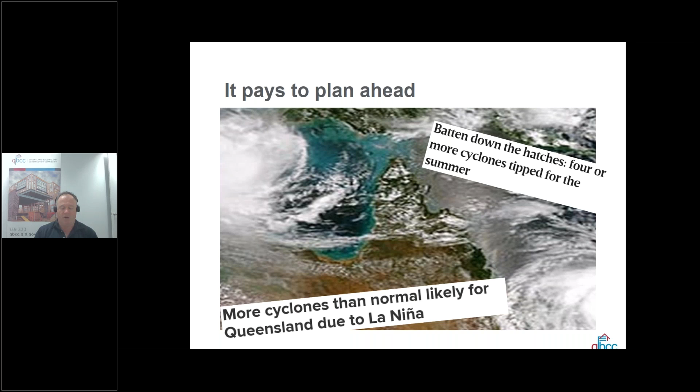There are many ways in which a site can be managed, and we will try and go through what we think are the more common items to be managed, but I'm sure you will also think of many more. Being prepared before the storm should go a long way to aid the recovery once the storm has passed.

Preparing your site. You may be in the unfortunate position that a natural disaster strikes during one of your builds, and I'm sure in North Queensland this is a matter of when it will happen rather than if. As a builder or principal contractor, it is your responsibility for the management of the site, and accordingly this will include the preparation of the site in the event of a storm.

Building sites can be dangerous places at the best of times, and good site management and housekeeping is something that all builders should aspire to. Not only does this make it a more pleasant place for your trades to work, it is generally safer and may avoid any costly penalties should there be a workplace incident.

I'm sure a lot of these points may seem like common sense, but good habits should be part of your daily routine. Should an unexpected weather event arise, you can respond more quickly and hopefully minimise damage, avoiding additional material and costly time delays. For any business, another costly and sometimes overlooked damage that can occur is that to your reputation, which may not impact the work you currently have in your books, but may be felt sometime in the future. So it pays to be prepared.

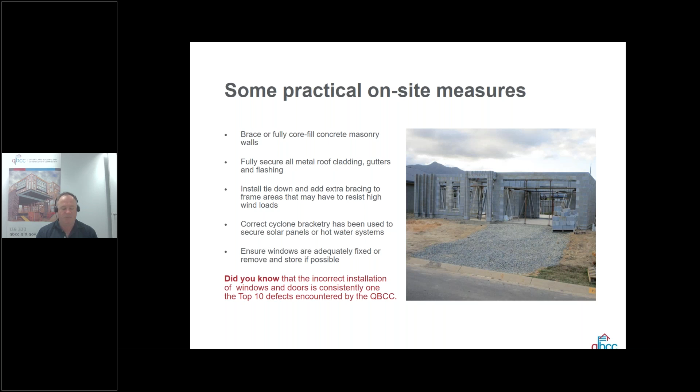In the event of an insurance claim, if your site has been poorly maintained, this may lead to premium increases in the future. So if you can demonstrate you have taken as many steps as possible to lessen the impact, it may lead to a more favourable discussion next time your premium is due.

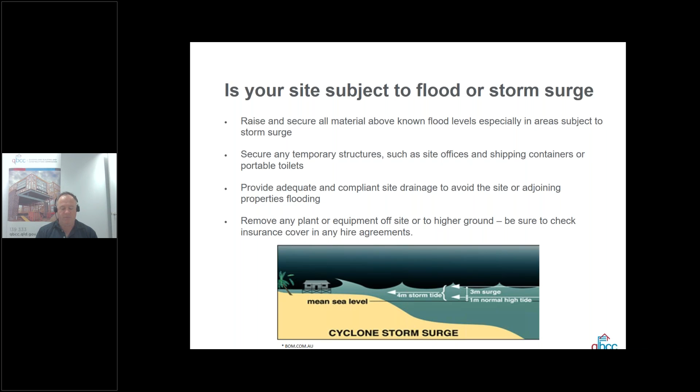It may not be immediately obvious, but it pays to be familiar with the location of your building site. Adverse weather such as heavy rain and overland flow or storm surge associated with low pressure systems during cyclones can present conditions that would be considered out of the ordinary for your location. It may also pay to check the storm cover insurance in any hire agreements for plant or equipment you may still have on site.

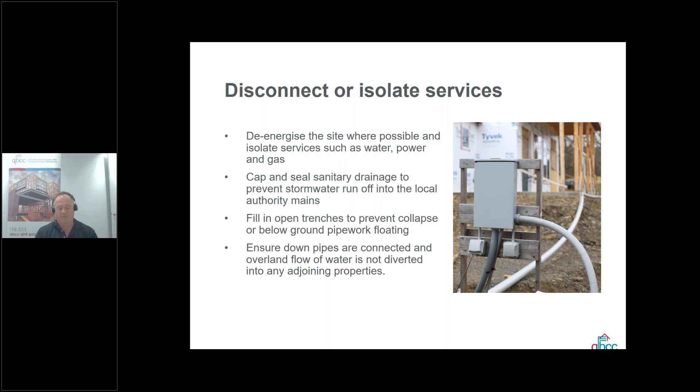Wherever possible, isolate or disconnect services that feed into your site. Disconnection should help minimise any live hazards that may exist when you return. If part of the building was to fail or collapse during a storm and cut or rupture any connected service, having them de-energised can also help avoid damage to the service provider's main infrastructure. Avoiding damage to the main infrastructure can help aid in the community recovery after a storm if time is not lost to re-establish essential services.

Offsite preparation.

Having a checklist in a time of crisis will allow you to systematically deal with issues and prioritise what needs to be done first. The checklist will also allow you to allocate items to specific people, and you will be less likely to miss an important task. Having thorough checklists will help aid you in pre-planning and also in recovery.

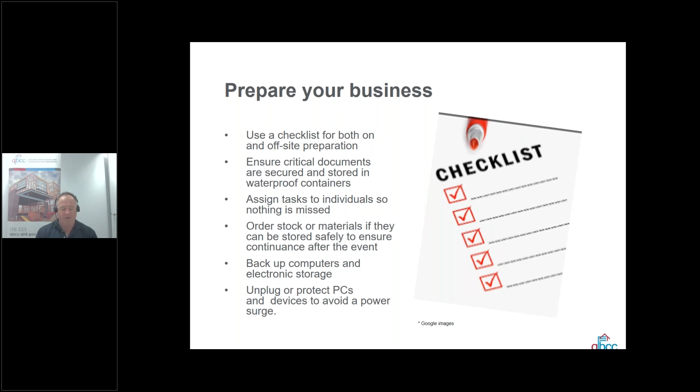Part of your plan should also include a review of all your business insurances to ensure they're up to date and reflect the true value of your business. It would be wise to check the current value of any plant and equipment, and if your insurance also covers any equipment that may be on hire.

Don't forget, your staff could be anxious and have to make emergency plans to secure their own family and property. So make sure you have contingencies in place and there is time for everyone to be safe.

Fuel for plant and equipment can become scarce in the days or weeks after a natural disaster. So filling up your vehicles and having some in reserve should be included in your plan. In times of emergency, you may be asked to help others if you have essential equipment. So having some in reserve would be a good idea.

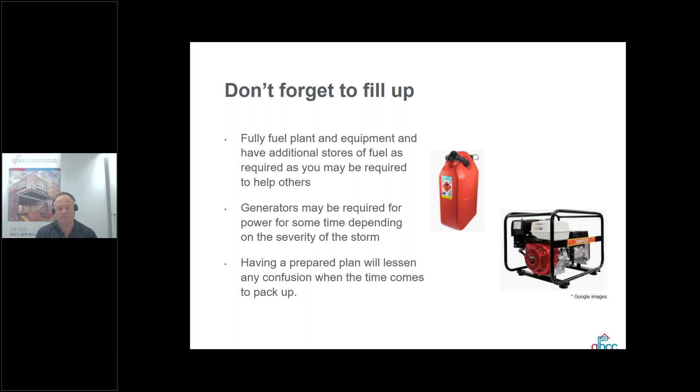Thank you, Bill. Okay, building work and site wind classification. Even in non-cyclonic regions, sites may be subject to very high wind loads based on a combination of factors. With most construction work generally specified in relation to a site wind classification, it's very important that this is correctly determined prior to commencement.

For new work, such as homes, sheds, commercial buildings, wind classification is typically already determined by a professional such as an engineer or building designer, and should be detailed on the approved plans, Form 15, or approval documentation. For renovations, smaller additions and re-roofs, there may not necessarily be an engineer or designer attached to the works. Wind classification can still be determined using Australian standards such as AS 4055 or 1170.2, or discuss with your regular engineer or certifier. There's also a number of helpful online tools and videos available, for example on the Cyclone Testing Station webpage.

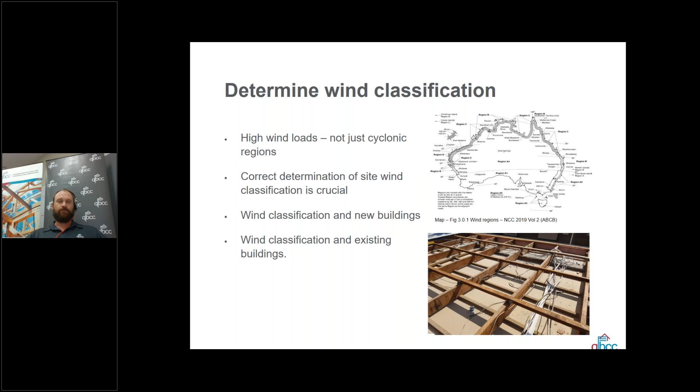Once site wind classification is determined, construction work can progress as per the approved plans, the National Construction Code, and any applicable Australian standards such as 1684 for timber frame construction, AS 4440 for roof truss installation, and the NASH standard for lightweight steel construction. Manufacturers' guidelines can also be relied upon for appropriate installation detailing for various wind classifications. When utilising these guidelines, ensure systems aren't mixed or mismatched unless explicitly approved so by the manufacturer.

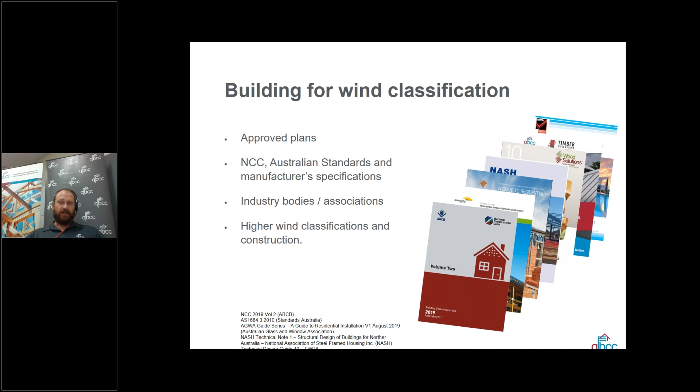There's also a number of industry bodies, associations and organisations such as the Australian Glass and Window Association, Timber Queensland, Wood Solutions and the Australian Roof Tile Association that have comprehensive and often free industry resources covering things like best practice, compliance, installation tips and industry updates. Generally, as wind classification increases, so too does the strength and robustness requirements of our construction work. When working in higher wind regions, you might see claddings required to be thicker, changes to framing and fixing detailing, or increased reinforcing requirements.

When we're looking at roof construction for housing, it's important to have an understanding of the different pressure zones to a roof, as identified in Australian Standard 4055. The areas subject to the greatest wind pressures are the roof corners, followed by the roof edges at the ridge, eaves gutter end, hips and gable ends.

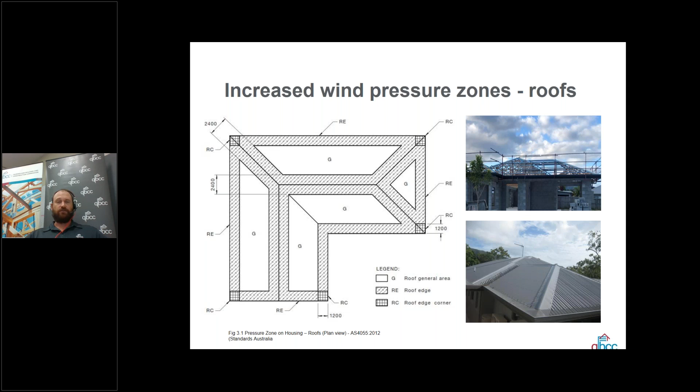These areas typically require more stringent construction detailing, such as closer batten centres or the use of cyclone assemblies in metal roofing, and the installation of additional mechanical fixings to roof tiles, just to name a few.

Similarly, when we're looking at external wall construction for housing, it's important to understand that the corners of our buildings are also subject to the greatest wind pressures. This can equate to more robust construction detailing for elements within these corner zones, such as claddings, linings, and the associated framing supports, and things like windows and doors, even when only part of the opening falls within a corner zone. When in doubt, check with the manufacturer and your certifier.

Returning to site after a weather event.

Before returning to site, make sure you keep up to date with the reports from emergency services and the local media. Ensure that you send suitably qualified staff to assess the site for damage, and maybe not the first-year apprentice. Preferably send staff with a buddy, just in case.

After a storm or weather event, be aware that many hazards may exist, and having a plan or checklist may greatly assist in re-establishing the site. You might come across new hazards that did not previously exist, for instance, structural damage to the building under construction, or items deposited on the site from other areas.

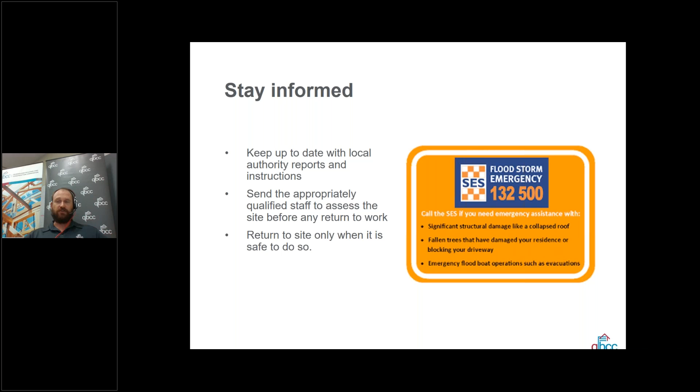Quite often in natural disasters, significant damage is sustained to service provider infrastructure and assets, and there can be long delays associated with these services being returned to their normal working order.

When the time comes, you should only return to site once it is safe to do so. If you identify areas where damage has occurred, or where dangerous substances may have been deposited, it may be necessary to safely barricade or secure off these areas until there is time to put a plan in place.

Don't forget that native wildlife may be seeking shelter during a storm, so remain aware that you may have some additional and perhaps unwanted guests living on your site.

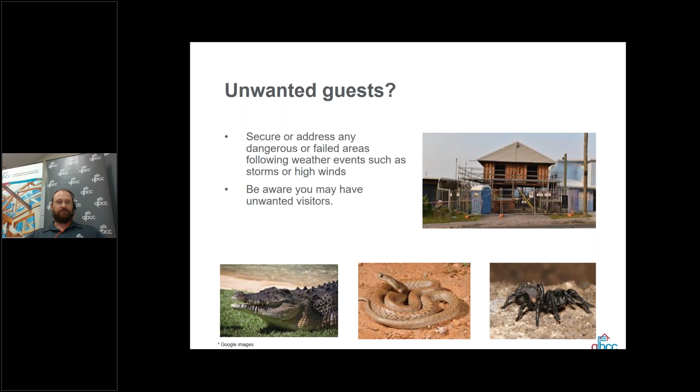Recommissioning of services may be necessary to identify any damage not immediately evident as part of the initial site check. Always ensure suitably qualified contractors are used when undertaking these recommissioning works.

Foreign materials may have been deposited on the site during a storm, so be sure to have any suspect materials tested before they're moved. When you do eventually move or dispose of site debris, ensure you use appropriate personal protective equipment.

Please be aware that there have been some recent changes to legislation relating to occupational plumbing licensing. Refer to the QBCC website for further details.

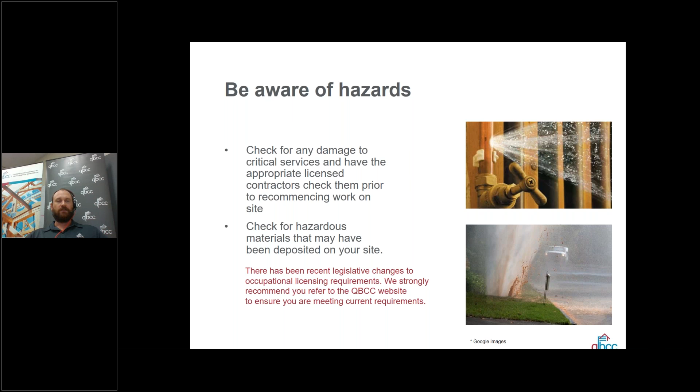Not all hazards encountered will be immediately visible. In fact, some may be invisible. Solar panels, for example, may be supplying power back into the electrical boards, even though the mains power may be disconnected. Ensure these systems are checked by a qualified electrician as part of your site check.

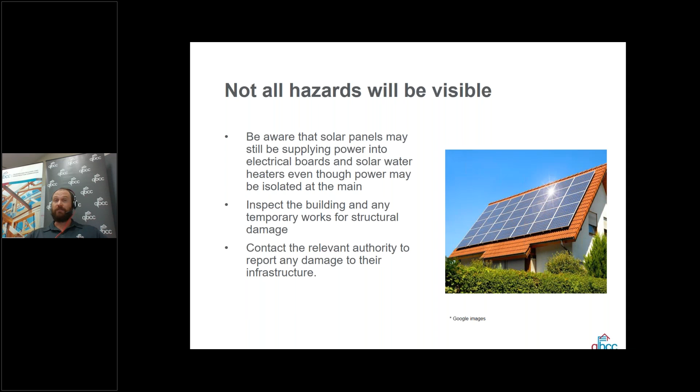And now I hand you back over to Bill. Yeah, thanks, Heath. So, resuming work.

There's no need to wait for a storm. You can register your business with the QBCC Find a Local Contractor page now, which can be a useful tool to promote your business and puts owners in contact with trades who work in the local area.

Natural disaster repair contracts are also available on the QBCC website, which can only be used for repair work and not the construction of a whole new dwelling. More information regarding disaster recovery for licensees is available on the QBCC website.

You can also register your details on a disaster recovery rebuild register when a natural disaster occurs, which is a separate register that is established for licensees interested in working in disaster hit areas as part of a recovery.

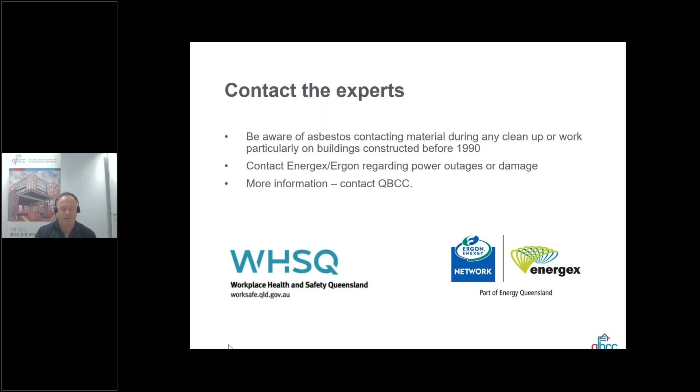You may be returning to work on an existing site or contacted by an owner as part of the reconstruction process and need to be aware that new hazards may now exist at the location. Older buildings constructed with asbestos-containing materials may have suffered damage during a storm, and precautions need to be taken even if minor or emergency works are undertaken on the building and should be cleaned up and removed before undertaking further reconstruction work. Similarly, if there is any damage to other infrastructure, such as power, communications, water or gas, contact the appropriate authority or engage suitably qualified trades to check the services before continuing.

So where can I go for more information? More information regarding storm preparation and recovery can be found by researching the organisations that we have listed here. The QBCC website has a wealth of information or will provide links to other useful organisations. You may already be familiar with the TV commercials featuring Jonathan Thurston as part of the Get Ready Queensland Storm Season campaign, and a number of others provided by other authorities or some of the insurance companies. Some of these sites also provide useful planning tools to help choose more resilient building methods and materials to help resist or minimise damage from a natural disaster.

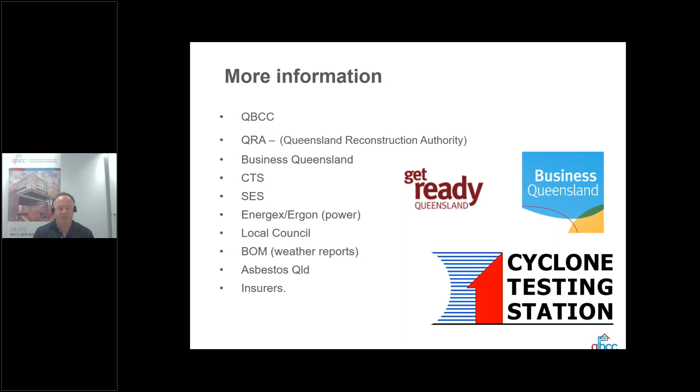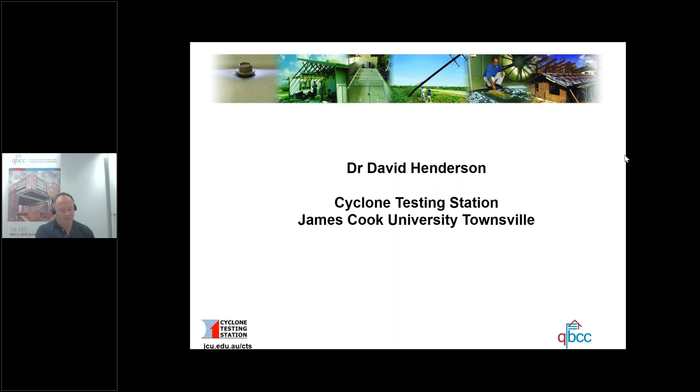We'll now move on to the second part of today's storm season webinar. We're fortunate to have Dr. David Henderson from the James Cook University Cyclone Testing Station here with us today. He is the Senior Research Engineer at the Cyclone Testing Station, and during his 28 years at the CTS, he's broken everything from screws through to complete houses. He's also conducted cyclone, thunderstorm and tornado damage surveys in Australia and overseas, and he's on the Australian Standards Committee for wind loads for housing and metal cladding. Many of you may not be familiar with the work that is undertaken at the CTS, and David will today give you an insight into the work that he does and what he gets to see when investigating the before and after effects of severe weather events. So without any further ado, I would now like to hand over to David Henderson.

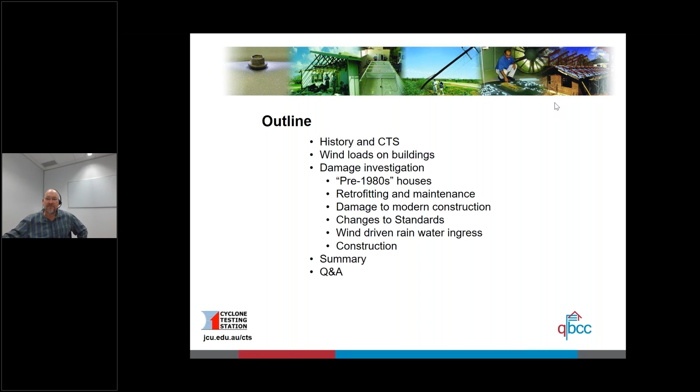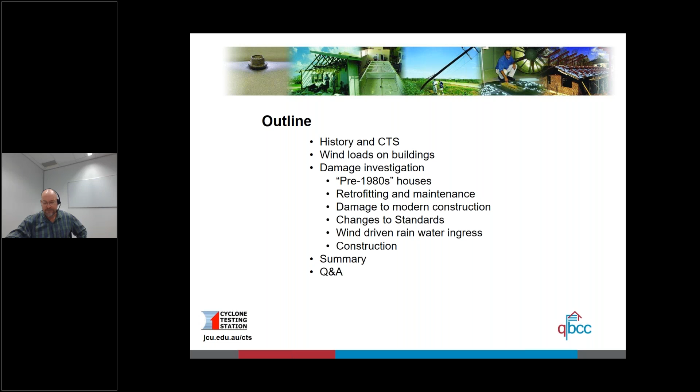There we go. So as Bill mentioned, we're going to have a quick history lesson on wind damage, and we're going to focus a little bit on the CTS, but really try to drive a lot of the examples that we've seen from damage investigations and see where that leads us into changes in current standards, and a little bit about some construction issues that we've come across in either current construction or wind damage, wind-driven rain being one of them.

So I'm sure everyone's fully aware that Cyclone Tracy caused massive amounts of damage when it went through Darwin, with 70 to 90% of housing being destroyed in the path of the storm. However, engineered structures did perform better than the housing. Similarly for Hurricane Andrew, 20 years later, you had this massive event come through and took out 63,000 homes. Both of those resulted in massive changes to home building standards in both countries.

What is it with the houses? Well, the houses are a common but complex machine, if you like. It's been a traditional process that's evolved from holding the roof up, not tying it down into the ground as the wind's trying to pick it up and shake it about. I mean, there's many elements in a house. You've got your top plate, your multiple ribbon plates, your rafters, your ceiling joists, king posts, queen posts, collar ties, lintels, all of these things, and they're all different in terms of their load sharing, how the load transfers through the house.

Whereas a portal frame structure, a shed or a major commercial building is so much simpler in terms of its beams and rafters design. Housing is very complex in that, and yet we've got to get the load path as that wind's trying to pick the house up through, with the roofing attached to the battens attached to the rafters, etc., or trusses all the way down. So wrist bone connected to elbow bone, shoulder bone, all the way down to ground level. So it's that load path that we've really got to pay attention to in our design and construction of our homes, and that leads us to that.

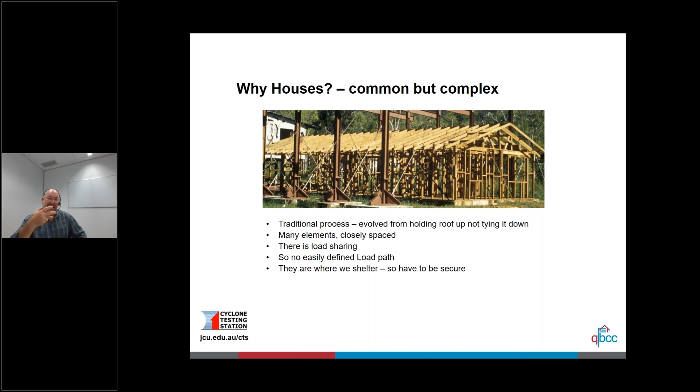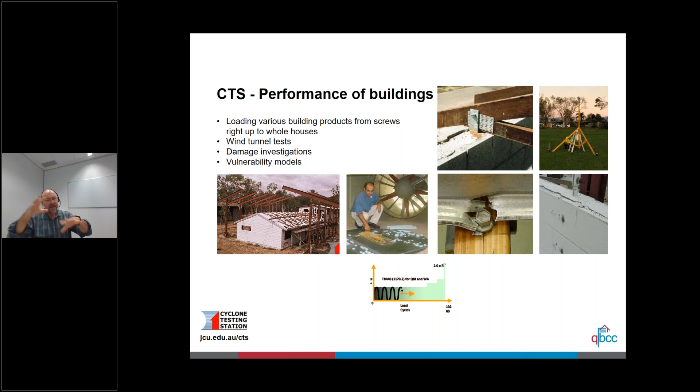Our homes, it's generally where we shelter, so they have to be secure. In terms of our understanding of homes, it's the Cyclone Testing Station, like other organisations, really digging into these complex little structures, our housing. So, as Bill mentioned, we've looked at testing everything from roofing screws, batten screws, all those types of things, right up to loading up full-size houses and applying loads across the roof structure and pulling on the walls and seeing how the houses perform. And also in that, we've got a boundary layer wind tunnel, like other places, where when you push the very turbulent wind across there, you're looking at how the pressures interact across the roof and the walls and all these different loading combinations.

But all of that presupposes that we know what the wind is or what we're designing for in the wind. So in terms of the NCC, the National Construction Code, we have the country divided up into several regions, Region A, B, C, and D, whereas in Region B in Brisbane, we've got 57 meters per second, whereas Region C, where Townsville, Cairns, and Mackay are, the cyclonic region, we're looking at 70 meters per second for design.

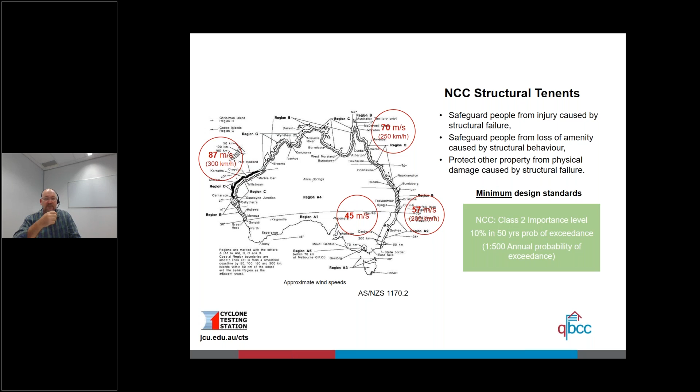Now that's set as a minimum design criteria. So the NCC puts out a minimum acceptable design standard. So we're basically building to the bare minimum, if you like. And those wind speeds that I was saying are for the same risk level across the country in terms of a class 2, so typically seen as our housing and normal type construction, which for a 1 in 500 annual probability of exceedance translates to roughly 10% chance in 50 years that that design speed will be exceeded. So that's what we're designing for as a minimum criteria.

Something to be on the lookout for is that within the latest public comment version of the wind loading standard, AS 1170.2, Region B for Brisbane is being extended. This is apparently to take into account a lot more of the storm effects, looking at all the anemometer records around that region. So the people involved in that standard have put through that expansion of Region B in that area.

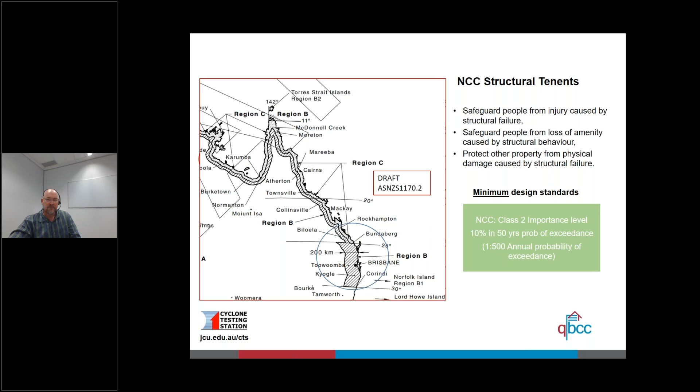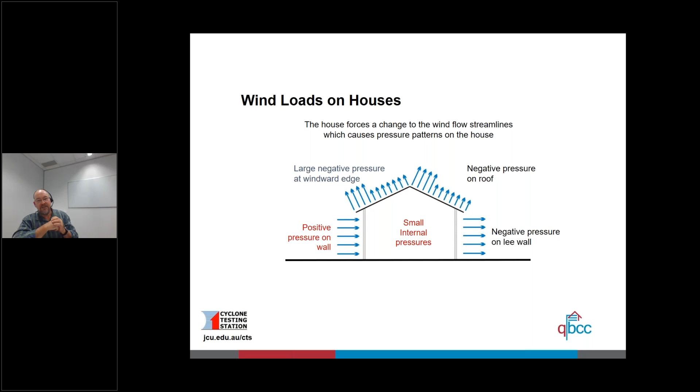So in terms of the wind loads over the house, we've got the wind rushing into that windward wall, going up over the roof and around the back of the house. That means we've got that positive pressure pushing on the windward wall, lifting up the roof, trying to pick the whole roof up by its roof cladding and pulling on the leeward wall. Now, if we have a breach in our building envelope, like a broken window or a broken door, that positive pressure instantaneously enters into the building space, potentially doubling the load on the structure.

Now, in cyclonic regions C and D, within the wind loading standard for housing, AS 4055, this is the assumed case. It's not necessarily how houses may be designed in non-cyclonic regions. There's commentary coming into the latest version of AS 4055 that should hopefully clear that up for a lot of people though. So look, we're going to take some examples out from different damage surveys that we've done.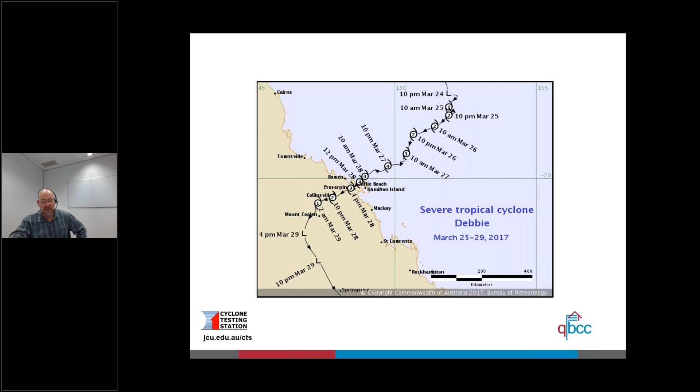So the big one obviously recently was when Tropical Cyclone Debbie came through in the Whitsunday area. Very, very scary event coming down through there. You can see there on those timestamps how it just sat and hovered around the Hamilton Island, Airlie Beach area. So not just these really severe winds, but the duration of them and the driving rain for that whole length of time as this cyclone is just moving around very slowly across the coast.

So the question is, why do we do damage surveys? What's there for it? Well, basically we're looking to see what did bad and what did good, looking at the good performance and the bad performance. But also crucially, it's really looking to see, was the design standard appropriate? Was the wind speed exceeded? In terms of, was this gone beyond that minimum design criteria? Was it the correct use of the design criteria, using the right materials put together in the right way?

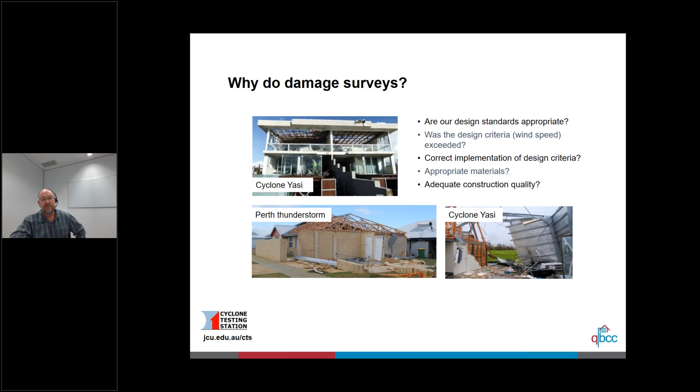So again, it's a matter of not just looking at the broken stuff, but also looking at the stuff that performed well. So we focused on the coast in this example, and really trying to get an idea of the wind speeds across those impact zones.

So we obviously highly rely on the Met Bureau's anemometer stations across the region, their official 10-meter tall towers in flat open terrain, typically at airports. And also we've got smaller towers that we drive out, we set up, we run away, we let them record the data for us, and that's basically at house height, and then we have them scattered with the permission of the councils. We've got them scattered through the towns that are in the impact zones to get wind speeds across there.

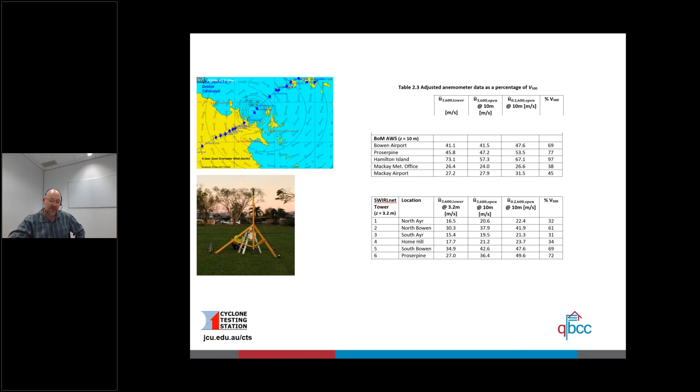So from those measurements, other measurements that were there as well, we can try to get a guesstimate of the design wind speeds across the region, which is really important to try to relate back to the aspects of damage and the aspects of how the building codes performed with it and in the construction.

So as we can see, we've got the extreme winds coming through Hamilton Island, Airlie Beach area, down through Proserpine, which is around 70 to 80% of the design wind speed, and then really dropping right off to less than 50% down Mackay to the south of the track, and less than 50% up at Home Hill and to the north of the track.

And you can see how wide the footprint of the cyclone is coming through. Again, a very massive, scary event coming through. A couple of 100 kilometers wide footprint, but remembering that the main peak wind speeds are near the center of the core for it.

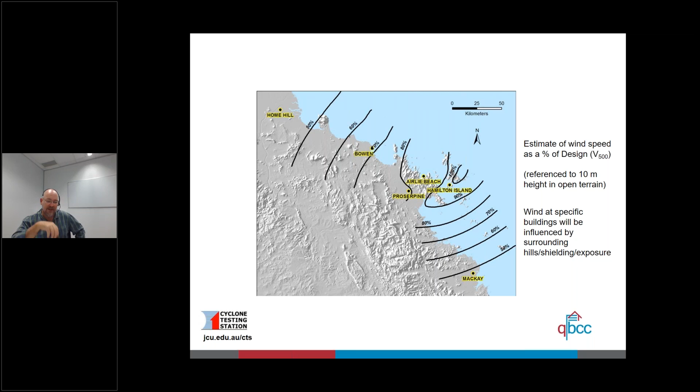So let's jump down into Proserpine then. So we work very closely and are thankful for the data from QFES, Fire and Emergency Services and Fire and Rescue New South Wales, as they're going around doing their rapid damage survey, looking at what they can see from the street in terms of what's needed, tarps or whatever else might be for their houses.

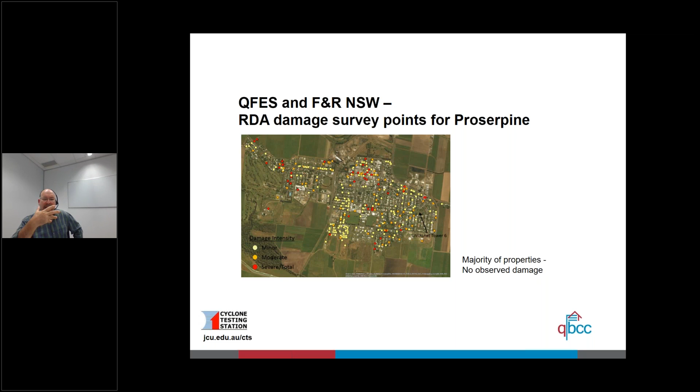And so the majority of the town there is green. So no real major issues for the majority of housing. If we strip those green dots away, we can see though there's a lot of minor, moderate, and severe damage across the town. And a lot of that damage, the severe damage, was associated with older housing. So housing built before those big changes came in the early 80s.

So you can see a lot of roof missing with the battens attached. The image in that top center line, you can see the existing old timber batten with the original 2 nails punched into the rafter. The cladding down in the lower left corner did its job well. New cladding, screwed to the old battens. The cladding remained attached to the battens. No worries, it was just the battens that let go from the rafters.

The retrofitting of that new screw roofing down to the battens stopped there. There was no strapping or no batten screws from the batten to the rafter connection, or from the rafter to top plate and rafter to collar tie and all those other things to strengthen up that roof structure, to improve its connections to the wall area.

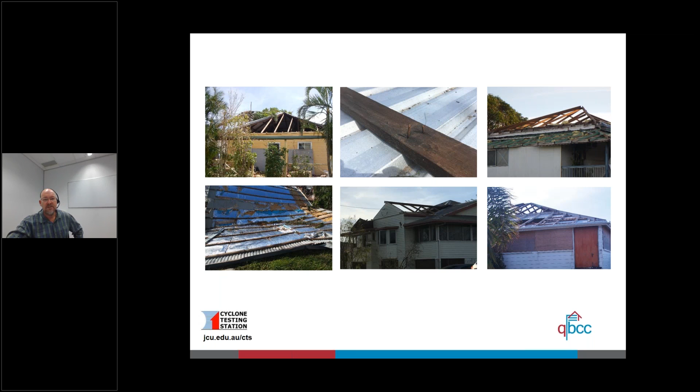And it's not just in cyclones that this happens. From the 2014 Brisbane thunderstorm event that went through, again, similar types of failure modes, new roofing put on older construction without the thought of the retrofitting going deeper into the structure. The image on the left, again, you can see the old batten sitting there with only a single nail this time, which should have been holding it to the rafter.

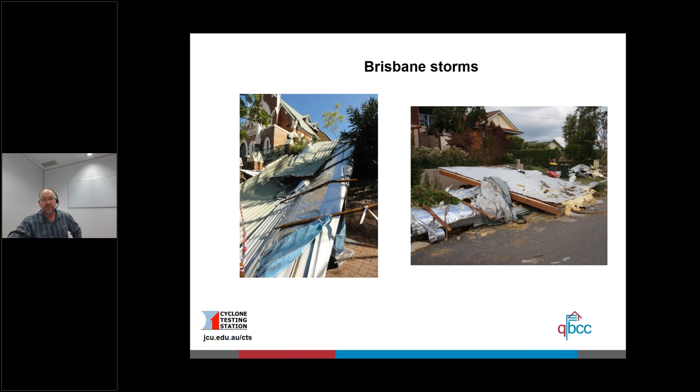Again, that should have had a batten screw, framing anchor, or strap, or whatever, to really improve that connection for it. Similarly, on the right-hand side of the photo, again, new roofing to older battens, and that larger chunk of roofing was an addition they did to the property that obviously wasn't tied down very well at all.

Now, as Bill mentioned, there is a lot of information out there. QBCC has great checklists for rebuilding. There's webinars and stuff for builders and for homeowners on the Cyclone Testing Station's web pages.

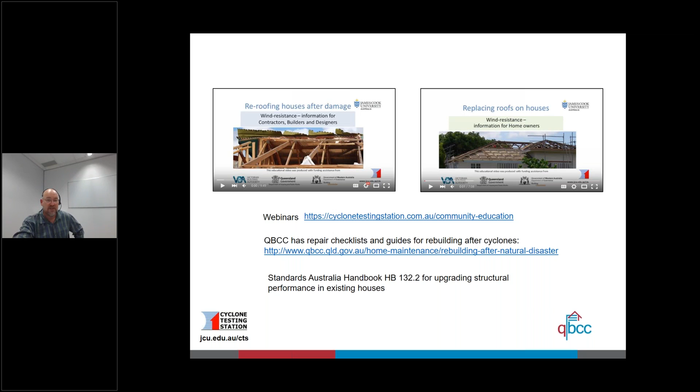There is an existing Australian handbook for upgrading the structural performance of existing homes, both cyclonic and non-cyclonic. So even when we're looking at wind speeds, that's a resource available.

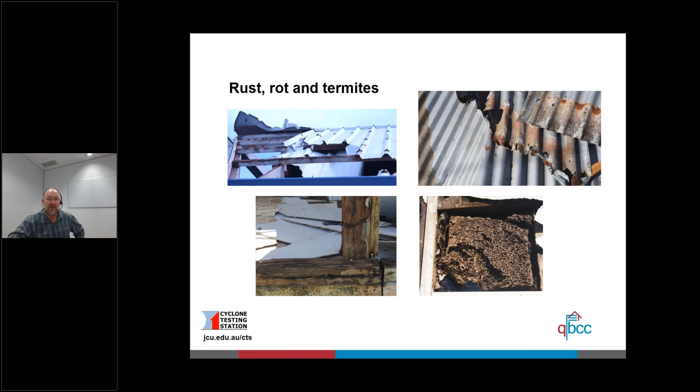What else can go wrong? One thing we come across is poor maintenance. These are pretty extreme examples of corrosion on roof cladding and screws, rot in the timber, and termite damage across the framing. Obviously, if that's in your place, you'd be doing something about it well before the event happened. But it may not be as obvious or in your face.

Here's a hotel motel on the Bruce Highway where we were doing street surveys looking for damage after Cyclone Debbie. We got permission to come on site, which was important because we'd inspected this place after Cyclone Yasi several years before Debbie, when it lost its roof during that event. So coming to see a new roof taken off during this event was notable, and remember, these wind speeds are less than 70% of the design value.

So technically we shouldn't be seeing failures of modern construction or new products. We're thinking, what's wrong with the roof cladding? We help write the standards, we do the product testing at the station - is the way we test correct? In crawling over the property it soon became obvious - no, the roofing was fine.

It was still attached to its clips and purlins. It's just that the larger rafters and framing system for the carport had let go, right down at the footing. The post had completely rusted through, and when the wind lift came up, it picked up the whole veranda and peeled it back over the hotel units. Remember, this place was re-roofed only several years before Cyclone Debbie, so this corrosion had already started happening and just wasn't picked up during that rebuild. Again, the weak link let the whole thing down.

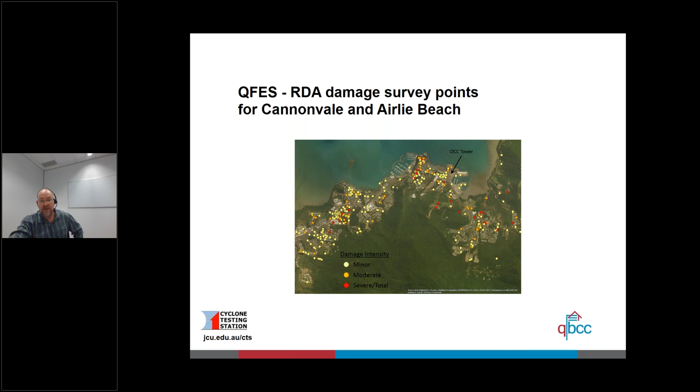If we go over to Cannonvale and Airlie Beach, on the coast, we came across examples of severe damage to modern construction as well, and a lot of examples of moderate damage. Some of those red dots are to do with flash flooding that went through some of those steep areas. But there were examples on Airlie Beach, Shute Harbour, and Hamilton Island of severe structural damage to modern construction built after that 1980 watershed moment.

A lot of that damage was to places that had a great view, that were on exposed sites. Obviously, if you've got a great view, you've got the chance of a lot more wind coming at you, and you design accordingly.

In AS/NZS 1170.2, the wind loading standard, there are factors where if you're on the side of a hill with a great view, you design for much higher wind loads. Similarly for AS 4055 wind loads for housing, instead of being down amongst the suburbs surrounded by houses with no view - which could be a C1 - if you're up with a view you could be C2, C3, C4, or even beyond the scope of AS 4055 and have to use 1170.2.

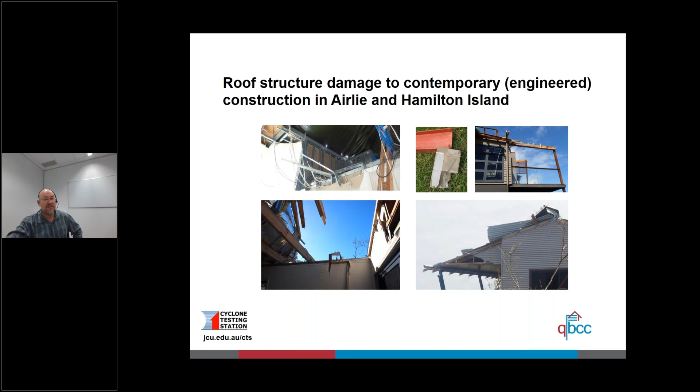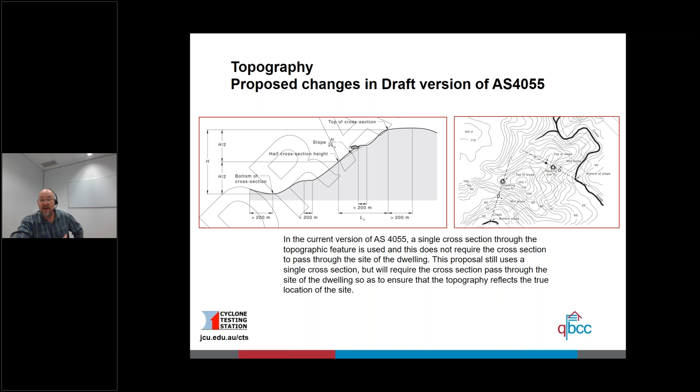On AS 4055 and issues with interpretation of that standard, in the recent public draft that came out for comment there was a whole heap of changes made to aspects, especially topography, to streamline it and make it more straightforward in working out the slope of the site for your house, and then the site classification for that location, with a lot more definitions for the top and bottom of the hill. So do yourselves a favor, look at the public draft when the new standard comes out and make sure you're familiar with those changes.

So just on topography and great views, we're back on Hamilton Island, and you can see there was a massive amount of wind load coming at this place.

You can see how the trees are completely stripped bare, lots of broken branches, everything else. So a heap of wind coming through here.

What we're looking at on the left-hand side of the image is that little bit of galv steel, the bracket that was holding the veranda beam, with the roofing screwed to it, to the top of that veranda post you can see on the right-hand photo. Now you've got a length of about 20 big roofing screws, Tek screws, 14 gauge, holding down the cladding to that steel RHS veranda purlin. But it all ended up in about 4 pop rivets in that bracket. Now that went through the design stage, the building stage, and an inspection stage, and yet that simple math of adding up all those big honking screws and ending up with only 4 little rivets wasn't done.

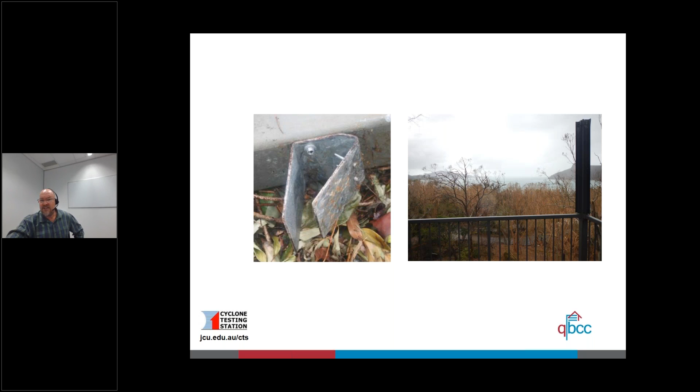So it's a matter of all that wind load getting concentrated. You've got to have bigger fixings, not smaller ones. The fact that this let go on this and several other units also meant that as the veranda peeled back, it took parts of the house with it, or the units with it, and then opened up the whole building to more water and damage.

And it wasn't just major stuff like that. There was a lot of other minor damage that resulted in a lot of major internal damage with things - cladding peeling off, gable ends, soffit linings, brick skins for not having enough brick ties or other aspects, all letting down the performance of our modern engineered structures. So these minor details not being carried through basically wrecked the building's ability to do its function after the event, really impacting on this community's recovery.

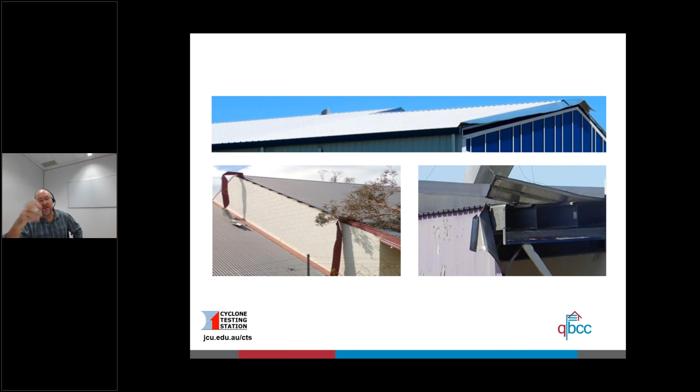A case in point is our simple bit of bent metal called flashings, trying to cover up the gaps between the roofing and the walls. These little bits of bent tin getting peeled back cause a fair bit of grief to the inside of the structures. So using damage survey data and getting access to claims data, working with insurers, we're able to work out that examples of this can cost about $1,000 per meter to repair, especially on units or strata property buildings, where the water comes in and goes through several floors and units, causing a great deal of loss.

So using that cost benefit work and finding and documenting so many of these types of failures, we're able to get changes through AS 1562.1, the cladding standard, so there's now a minimum thickness required for the flashings and a minimum fastener spacing and type of fasteners used. No longer can you use pop rivets; you've got to use real screws, and they've got to be fixing to something real underneath the cladding. So if you're not aware of it, please get a copy of 1562.1 and have a dig through that.

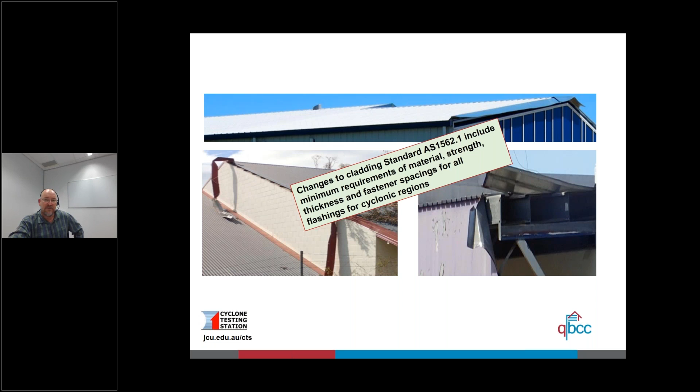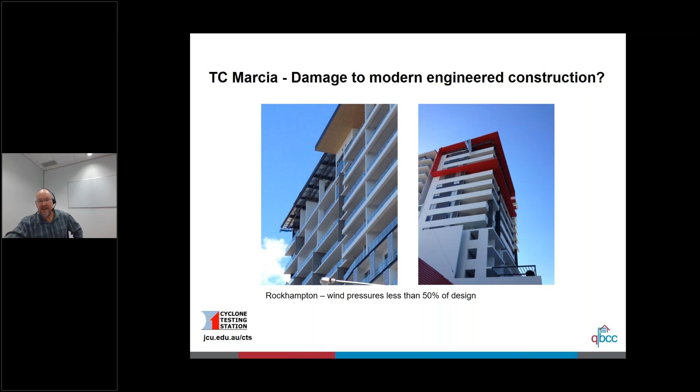Similarly, this one's an example from TC Marcia. These very modern high-rise buildings in the centre of Rockhampton had wind speeds less than 50% of design come through, and yet you've got cladding hanging over the edge of the building. You've got loss of soffits from very high up, also adding to the debris field as it gets strewn across the town. If we go up to the roof of the place, we can see the aircon's been knocked over, the vent systems, the flashings on that skillion roof peeled back, taking the roof cladding with it, causing a great deal of damage.

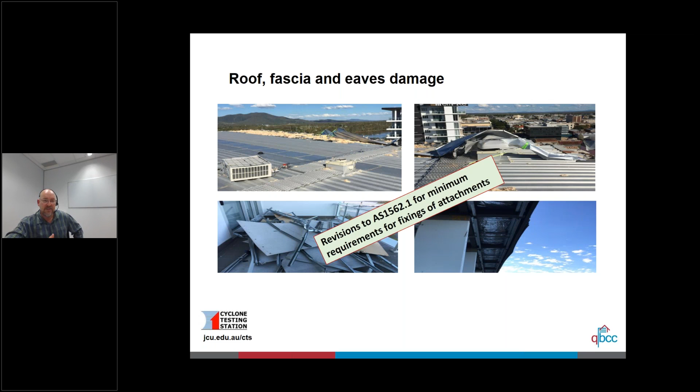So again, in AS 1562.1, we've now got minimum requirements for fixings of attachments that are on the roof structure - not just fixing to the roofing, but down fixing to purlins or other types of substantial support.

And then we get on to other things - what happens if they do fall off your building. So there's wind-driven debris. It happens in thunderstorms, it happens in cyclones. The wind picks up stuff, whether it be from the building or from what's lying around in the yard, and hurls it at other things. So we've got bits of timber from older housing getting thrown through other points, damage that's right down to complete sheds that have no proper footing details getting picked up and dragged through other housing.

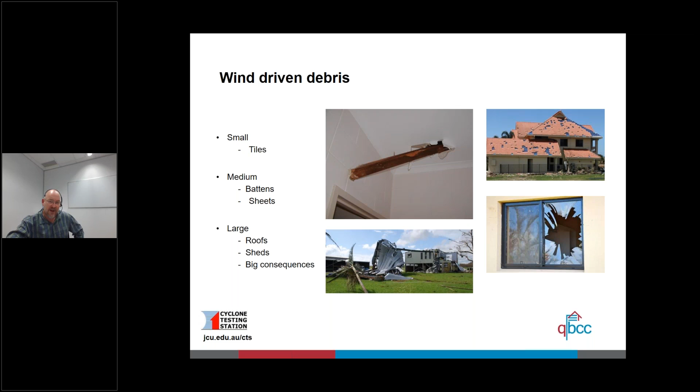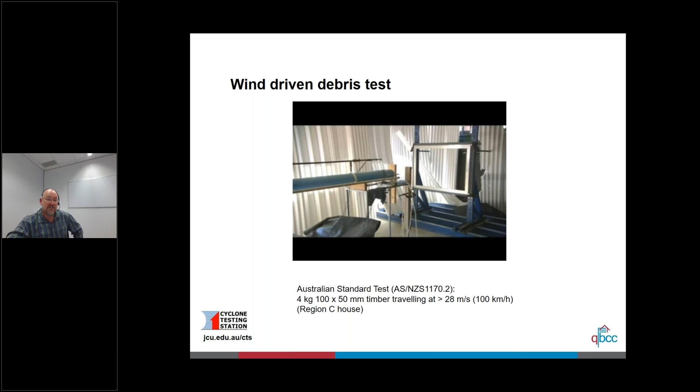There is a test that we can do. It's an Australian standard test, and yes, it is a fun test to do. We basically take a 4 kilogram piece of timber and hurl it at unsuspecting building products, and within that it's got a speed in excess of 28 meters per second, or 100 kilometers per hour, as being a fraction of the wind speed that's happening at that time.

Now, in terms of what we're looking at, you're trying to protect your building envelope. So it may be in terms of a life safety issue for a cyclone shelter, that there is a wind-driven debris test, but other times it's trying to protect that the door, cladding, window screen, or whatever it might be, doesn't get broken and doesn't let the pressure enter into the building space.

But it's not a matter of just hitting in the center of something, because that may give a lot of deformation as that missile hits. The product, or in terms of the roller door, might be able to give and absorb that energy. But if you hit right next to the edge of it, it's a different matter, it's a real cutting action. So just don't hit in the center - you've got to look at other aspects to get through to make sure the product passes.

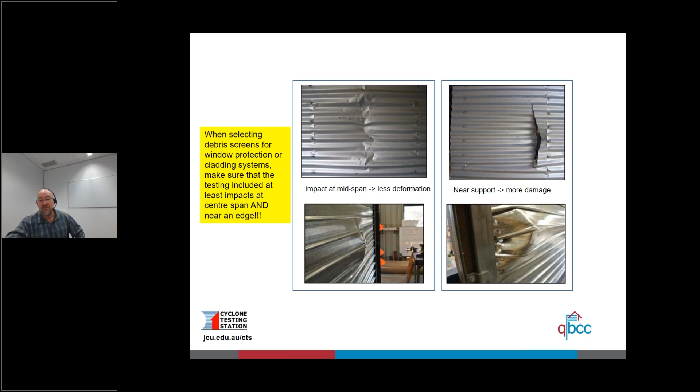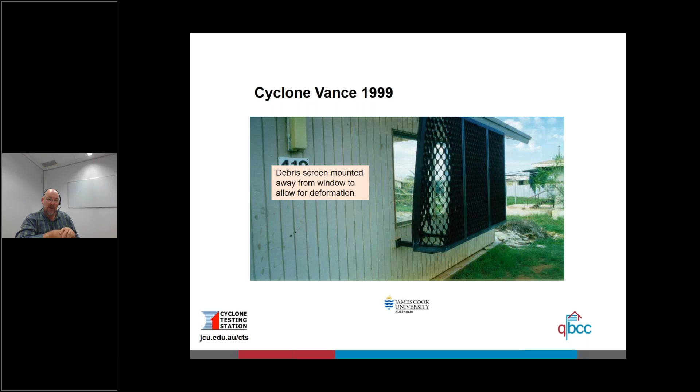Here's a case after Cyclone Vance. It's a really great window screen set well off from the window, so when it gets whacked by something and deforms, it doesn't break the window behind it. Trouble is, the front door blew in. That pressurized the building space, popped out the end wall, popped off the roof, causing a great deal of damage. We've seen that time and time again after many other cyclones - you've got doors that get let down.

Now, whether there's not enough surface area and not enough meat in the drop bolts or the locks, or they're using hollow core doors that with the lock set, you're not left any meat, and it just smashes through as the pressure pushes on it.

So it's really a matter of looking at how to get that building envelope to remain intact. If you've got a door entrance opening inwards like this, it's a matter of having a good quality lock, trying to keep away from hollow core doors with not much meat in them, and using drop bolts as well, just to spread that load out. So you've got a couple of hinges, not just a center point, but maybe a drop bolt as well to spread the load out across the frame.

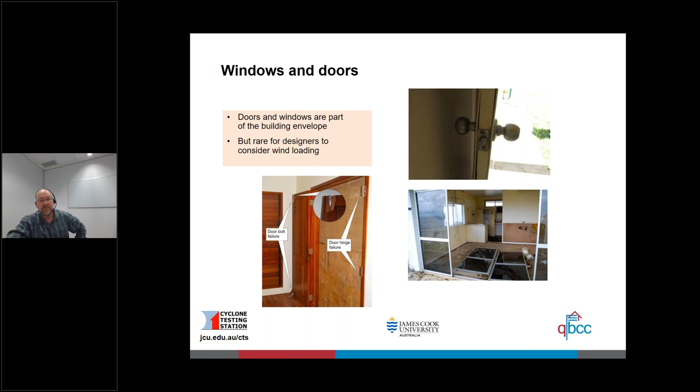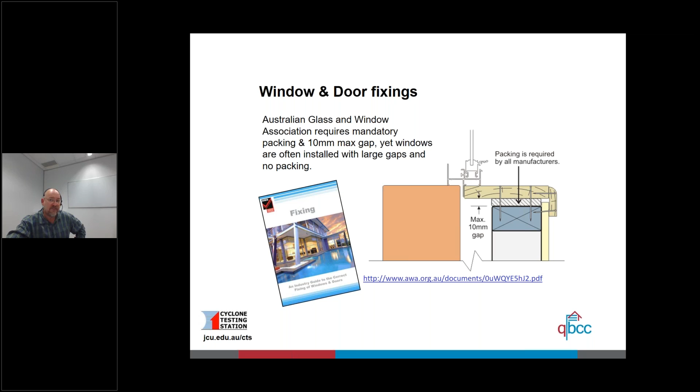Similarly for windows, issues with poor fixings of windows in terms of frame, both old and new construction. And there is a lot of work out there - the AGWA produces some great guides on how to design and fix windows into house framing. So have a look at their website on that one.

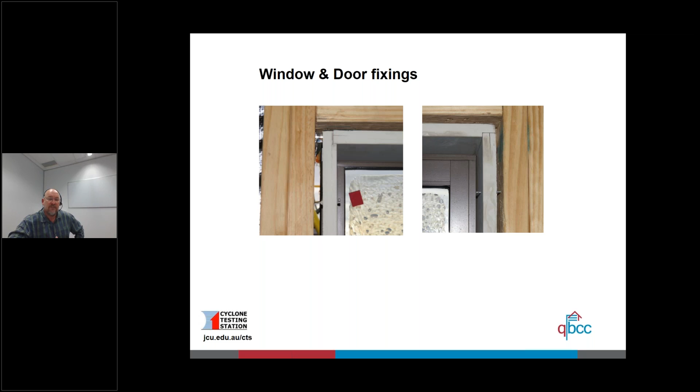A lot of the manufacturers are putting fixing details stuck to the window when they get delivered to site. These are photos taken of the information that was in the center of the window, showing the minimum required fixings, the packing, the type and size of nail, etc. However, yet again, we find a lot of issues where it's just framing or finishing nails used to hold the frame in, then covered up with the architraves - not even any packing in many examples. So again, we've really got to make sure we've got the right products designed for the right place and followed through in terms of the installation instructions.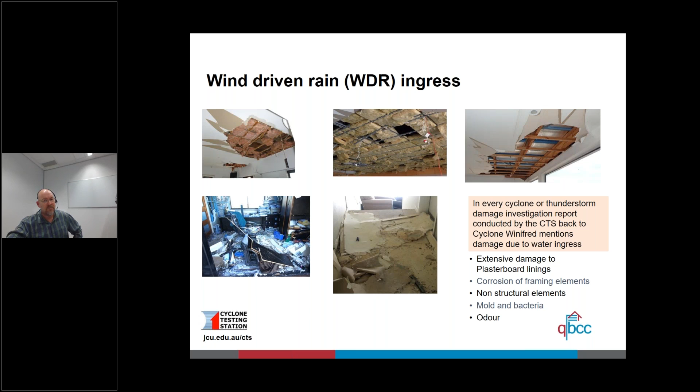But we don't actually need a hole, a broken window, or a door to let the water in. So, oops, my apologies, I've got to click here for now.

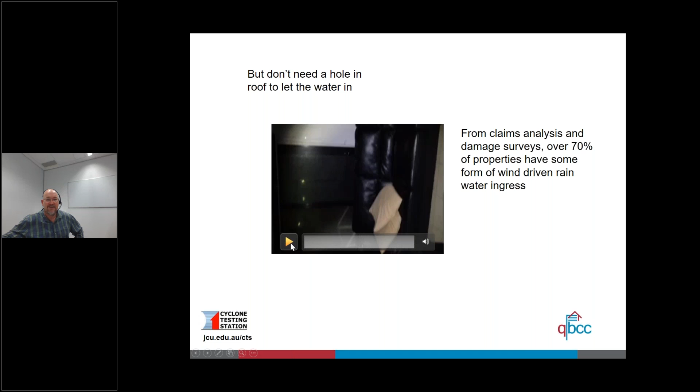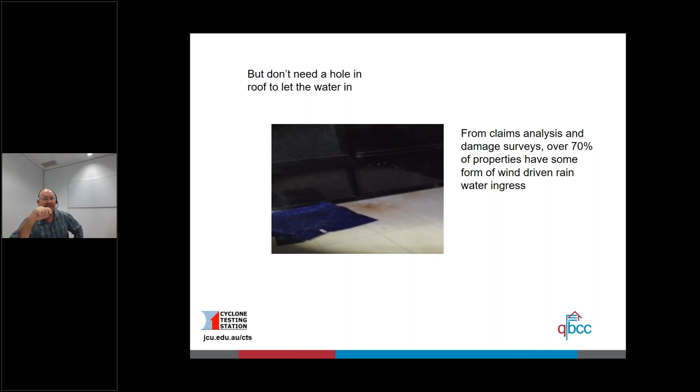So this is an example where we've got the video running. As the homeowner points back to the window, you're going to see a whole heap of water gushing through the slider there. It's also coming under the sealed end as well. Obviously he's paying good attention to safety to keep away from windows, and there's just rain coming down through that ceiling there. What you can't see is that this is a two-story house.

And that water is coming through the balcony door on the top floor as well, then coming down through the floor and down through the aircon ducts into the house. So you've got so much water coming in during these severe wind events.

From a lot of the surveys we've done across different cyclone events, over 70% of properties have some form of water ingress. Whether it's coming in through the roof, through poor flashings or ridge cappings, box guttering systems that don't have sufficient overflows, under our doors, through our windows, it's coming in through all these different places.

Some of it can just be mopped up without much distress afterwards. Generally there's a fair bit of stress to the homeowner at the time, but a lot of it does cause so much damage that has to be repaired afterwards, to the extent that people may not even be able to live in their house after the event.

So why is this? Why are we getting so much water coming through these different things? Well, in terms of windows and doors, especially glass windows, there is actually an Australian standard test, but it's a very low pressure that's being tested for. It's even well below serviceability design pressures. So even for our cyclonic conditions, it's 200 pascals, whereas the design pressure might have been up around 2.5, 3 kPa, 3,000 pascals.

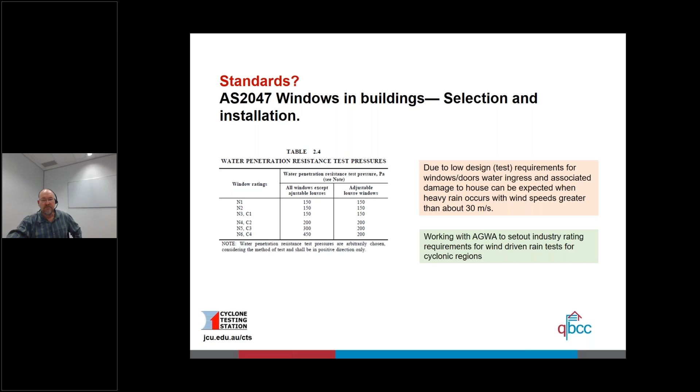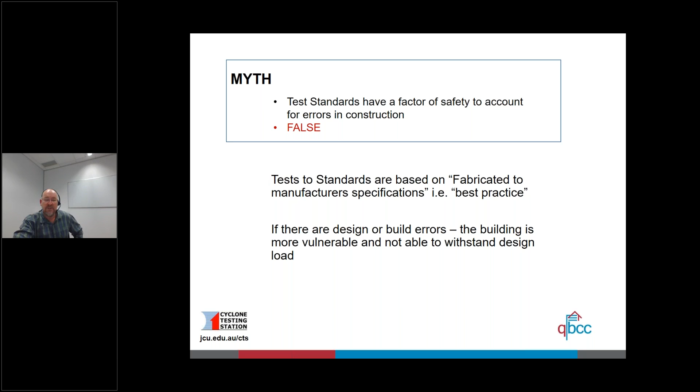So it leads us into other products. A lot of people say that test standards have a factor of safety to account for errors in construction - that's just rubbish, it's false. Test standards are actually based on being fabricated to manufacturer specifications, so it's to best practice. So if we've got design or build errors, the building is far more vulnerable and not able to withstand the design loads.

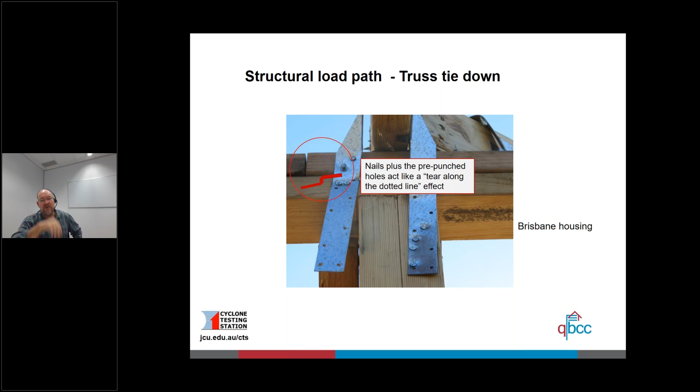So some cases in point - we've got strap examples taken from all over the place in these photos. From one of our surveys around the Brisbane area, here's some tie down strap for truss to the top plate. You can see that on one of the legs, the nails have missed the holes for the framing anchor, and with all that coming through it's almost like a tear line now. Not only do you have the pre-punched holes, but you've got new holes drilled in by the nails running through. So you've greatly weakened that strap, and it's not bent even around the plate either.

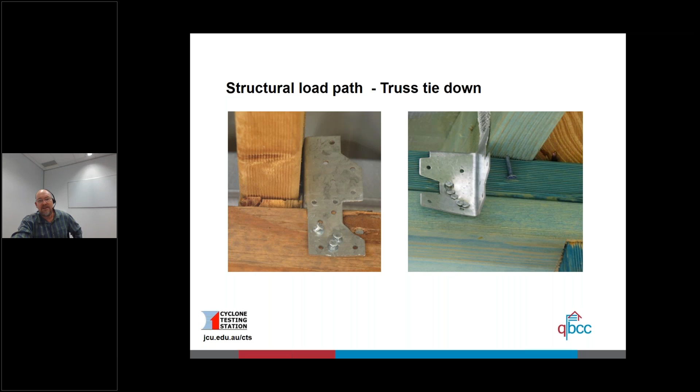Framing anchors, again - you've got the one on the left where one of the nails missed the framing anchor completely, so it's down from 4 to 3 nails, and those 3 nails aren't in the right places either. On the one on the right, there's actually more nails than required, but having such a grouping basically splintered all the area underneath those gun nails, again greatly weakening any hold down that framing anchor may have had.

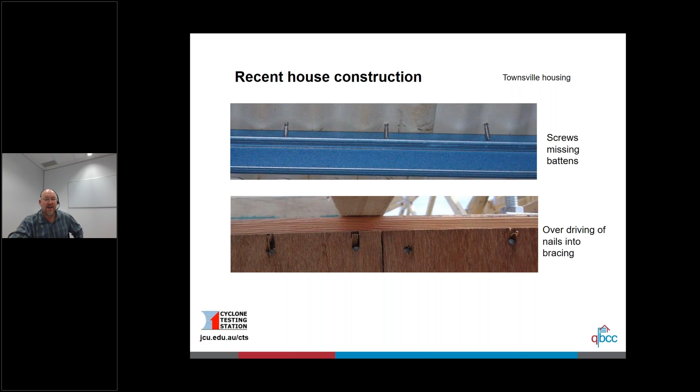So over half the way through the plywood, the nails were hammered in too deep, leaving hardly any capacity in that bracing panel because of the over-nailing. The manufacturer's details specify that the nail should be slightly proud of the plywood. Having the gun nail set so hard that it goes through has basically destroyed any capacity that bracing element may have had.

Metal battens are pretty good stuff, but not when they're fixed like this. The screws have to be flat against the foot of the batten. If they're on an angle, they come down and score the web of the leg of the batten, greatly weakening the capacity of the system, partly cutting into it. If the head of the screw is on an angle, as the wind uplift tries to pull up the batten, that head of the screw will cut into the foot.

Similarly for roof cladding, if you don't have that screw perpendicular to the crest or the rib, and it's on an angle, all the load bears on one edge, and it'll basically cut through that cladding pretty quickly. Again, this greatly reduces the capacity of the product.

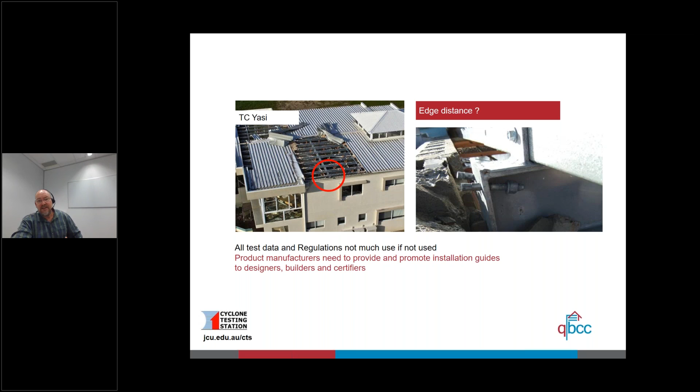So to conclude, the wind finds the weakest link. Failure of a single element can lead to the progressive failure of the structure, and continued education and awareness of the whole community—builders, regulators, manufacturers, and owners—is required, especially owners in terms of the maintenance of the structure well after the building is finished. Thank you.